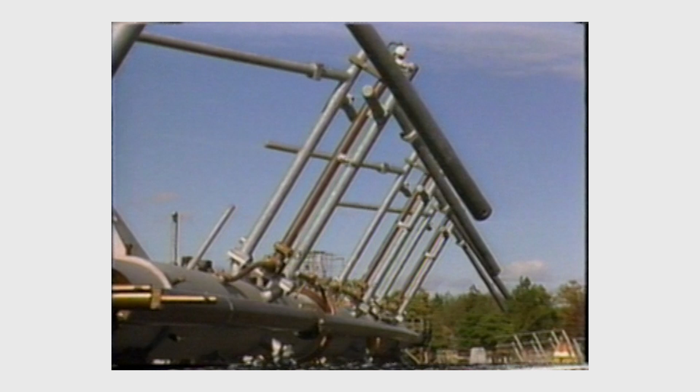For over 80 years, Dielectric has stood at the forefront of broadcast innovation. From our humble beginnings in 1942 during the early wartime broadcasts, through the golden age of television, to today's cutting-edge digital systems, we've engineered solutions that stand the test of time. From our home on the coast of Maine, we've built a global reputation. We power 85% of America's television markets and serve broadcasters in more than 80 countries.

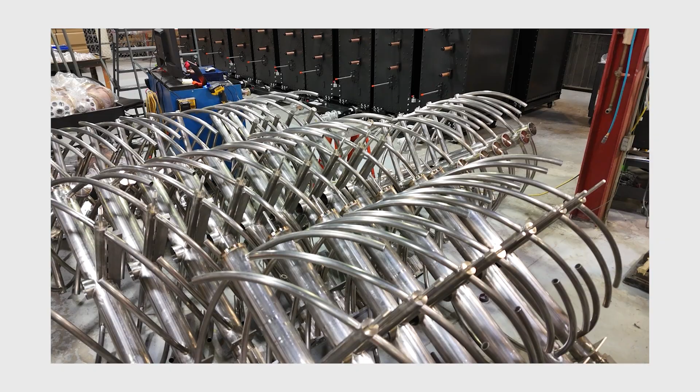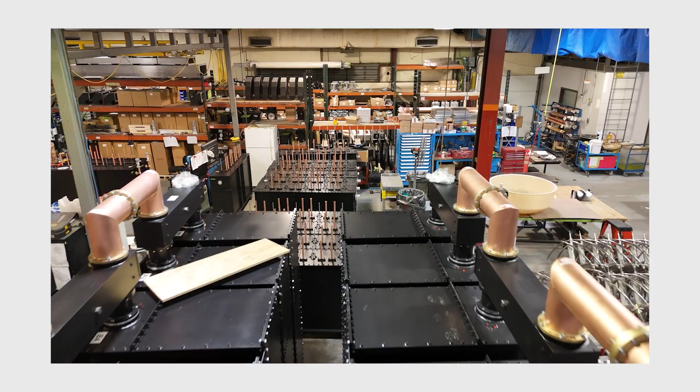But we don't just build products. We craft custom solutions for your specific challenges. What sets us apart isn't just our experience, it's our relentless drive to innovate. Where tradition meets technology, you'll find Dielectric leading the way, just as we're doing now with our revolutionary approach to FM broadcast technology. What if you could achieve superior filter performance using half the space?

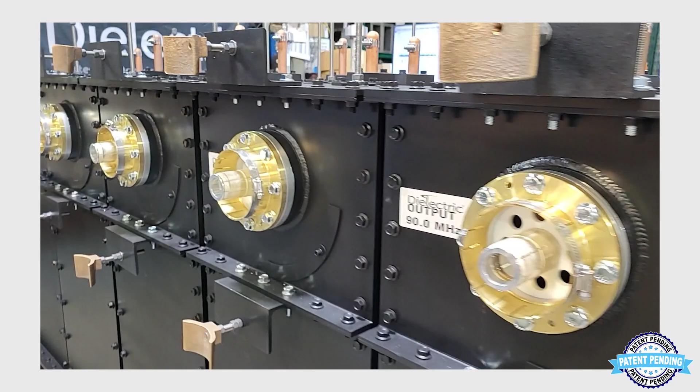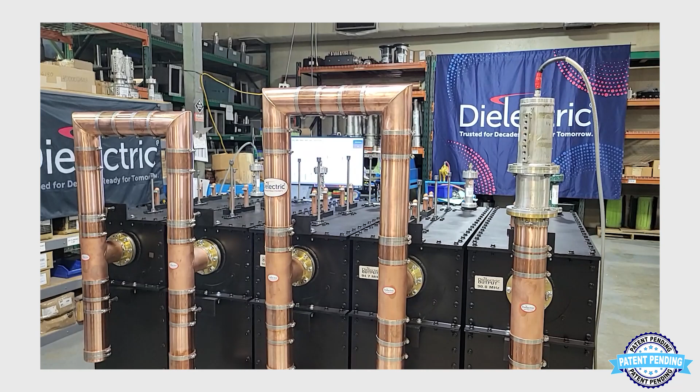That's the breakthrough we deliver with the reconfigurable Manifold combiner. As the company powering 85% of television broadcasting across America, we've applied our engineering expertise to solve the most pressing FM technology challenges. The result is a patent-pending system that's quickly transforming the industry standard. In the next few minutes, you'll discover how Dielectric's approach delivers unmatched flexibility and efficiency. For broadcasters who demand both performance and value, let's walk through how far this technology has come.

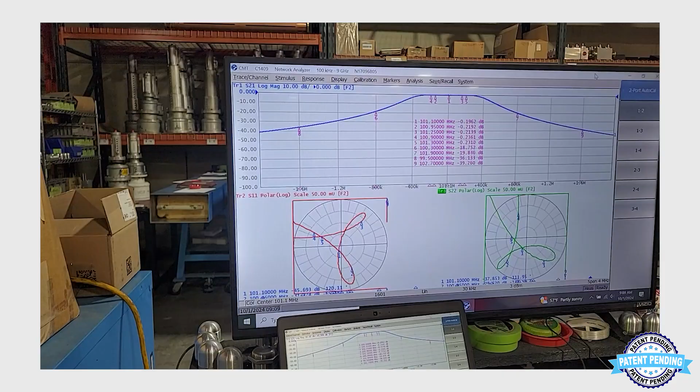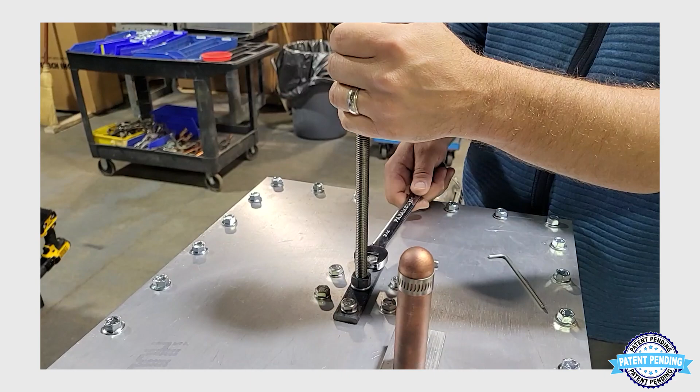We'll start where every great system begins, with exceptional components. Our filters aren't just built, they're engineered for real-world performance. Technicians fine-tune each filter with remarkable precision. That's loop-coupled design in action, allowing adjustments to the passband, rejection, and VSWR without ever reaching for a screwdriver to disassemble the unit. It's a stark contrast to what you've experienced with traditional designs.

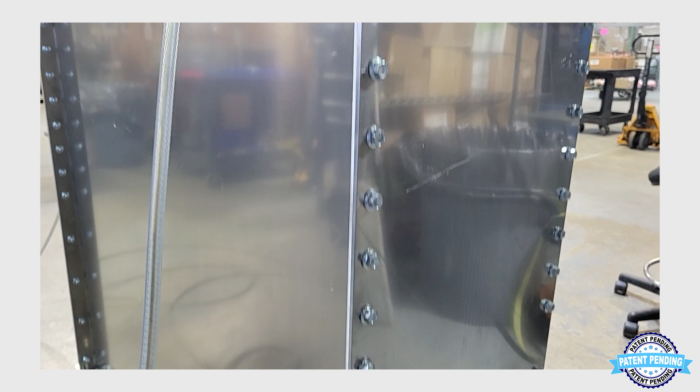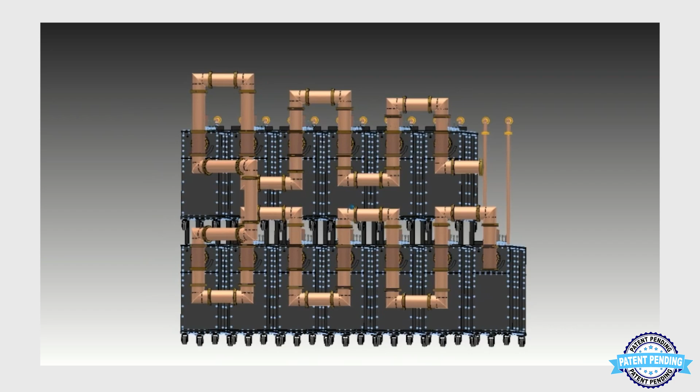We invest in materials that stand the test of time, even in challenging environments. And because we understand that every installation is unique, our design adapts to your space, not the other way around. This flexibility is something your engineers will appreciate from day one.

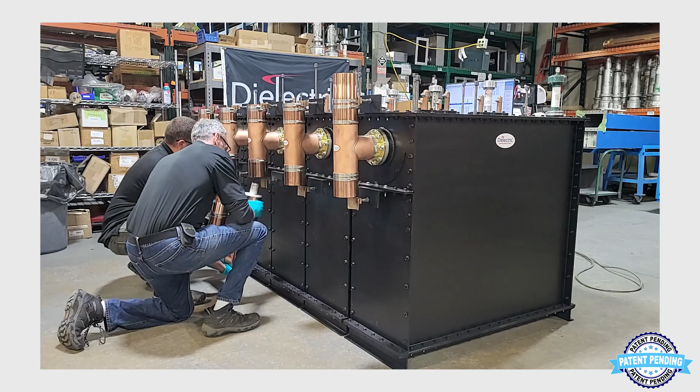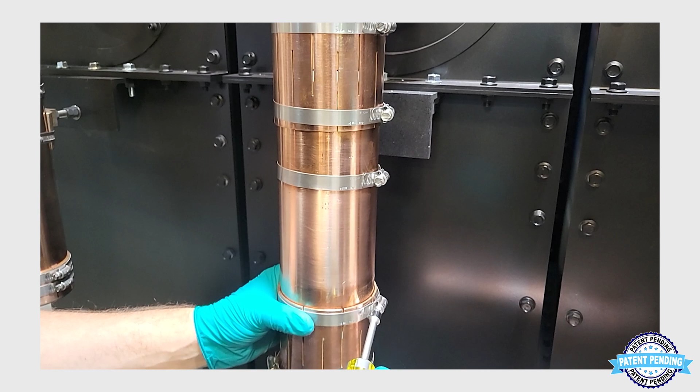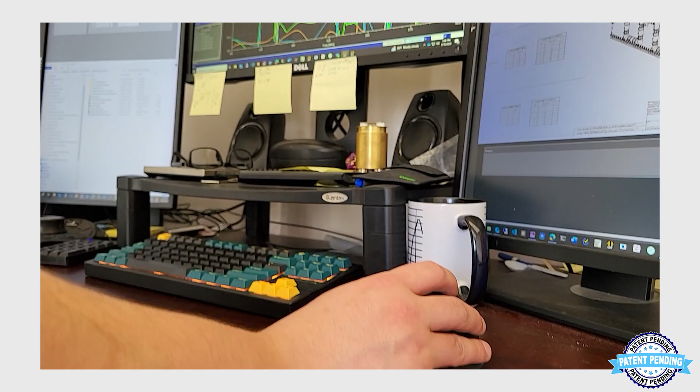Next, these finely calibrated filters come together to create a system that's truly greater than the sum of its parts. Here's where decades of engineering experience pays off. What you're watching is the assembly of a system that's already been optimized through advanced electromagnetic simulation. Remember the weeks of trial and error that traditional Manifold combiner installations require? We've eliminated that entirely. Every line length is precisely calculated before a single component is manufactured, a breakthrough that transforms what's possible with Manifold technology.

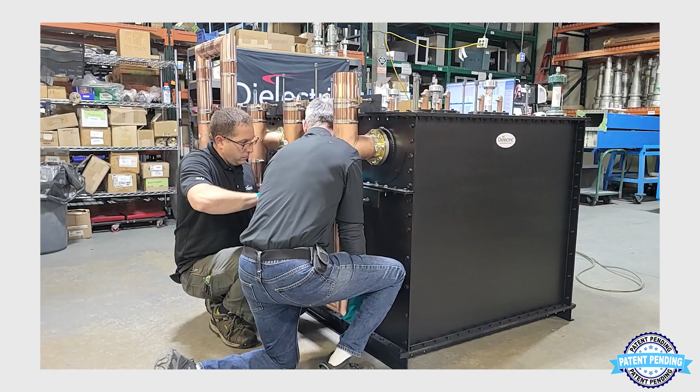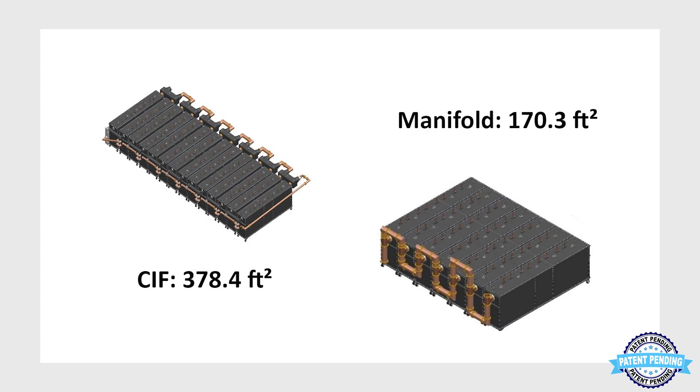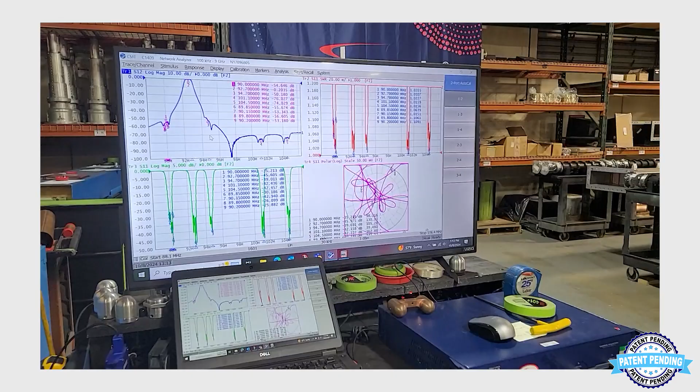The secret is in making the Manifold spine an integral part of the circuit itself. It's a subtle difference that yields remarkable results. This system requires less than half the space of a comparable CIF combiner. That's space you can use for other critical equipment, or simply to create a more accessible work environment. And because the pre-engineering is so precise, floor tuning becomes a quick verification rather than a lengthy process. The result? Faster installation, lower labor costs, and quicker time to broadcast.

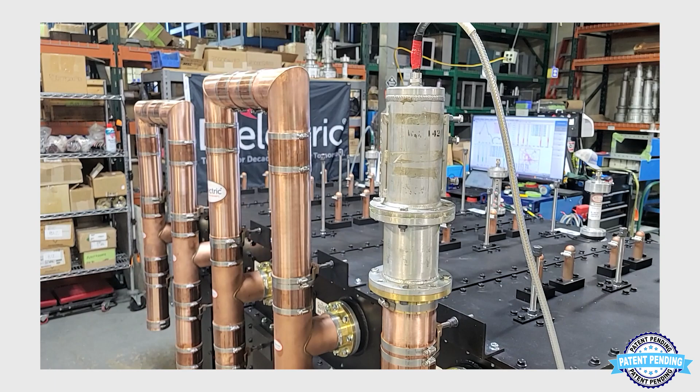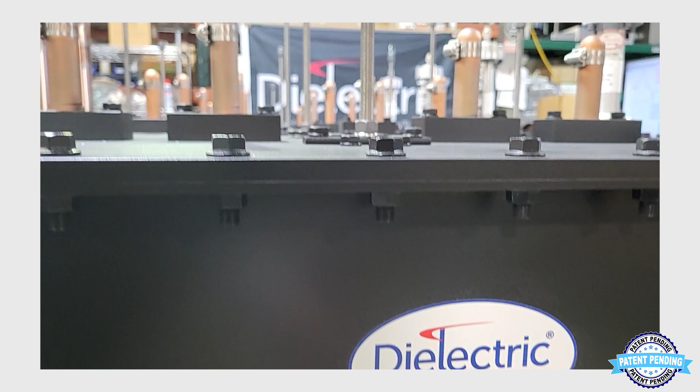But the real breakthrough is in what happens after installation, the operational flexibility that sets this system apart. Here's where conventional wisdom gets turned on its head. Traditionally, Manifold technology came with a significant trade-off, compactness at the expense of flexibility. We refused to accept that limitation.

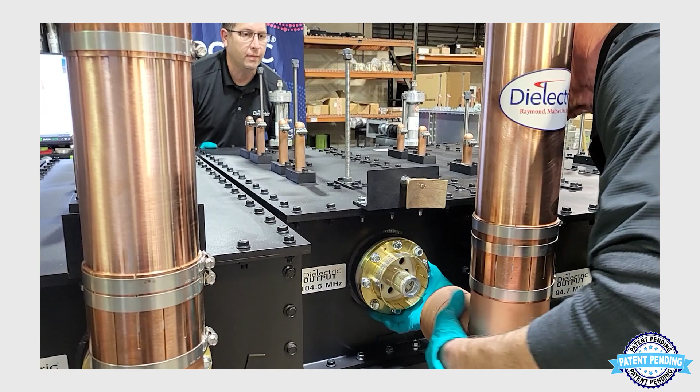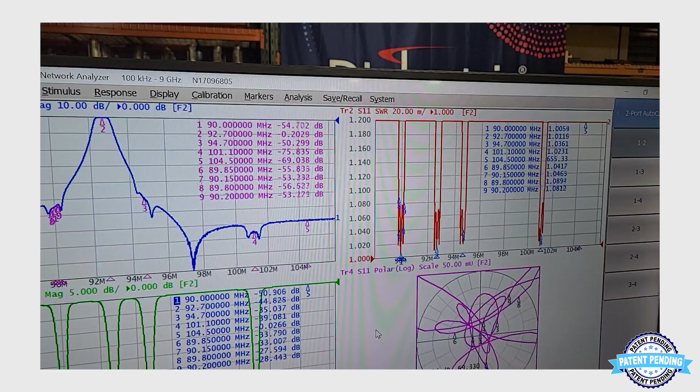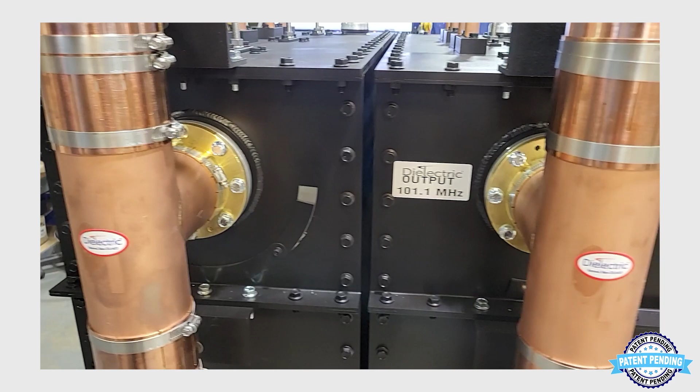Instead, our engineers worked to remove a single filter from the system and add a short to the spline. Here's what doesn't change. All other stations continue broadcasting without interruption. It's not magic, it's just meticulous engineering. This capability transforms the entire maintenance approach. When a filter needs attention, you can service it without taking your entire system offline. You can install a spare filter immediately, or the original can be serviced and returned to operation, all while your audience remains connected. Previously, such operational flexibility was only available with large, constant impedance filter systems. Today, welcome to the best of both worlds, compact size with uncompromising flexibility.

But what about the future? As your network grows, can your combining system grow with it? Let's put another industry assumption to rest. You can seamlessly add a 6th station to a 5-station manifold, something previously thought impossible without major system overhauls. This isn't a one-off trick, but a fundamental capability of the design. You can do it repeatedly with different frequencies.

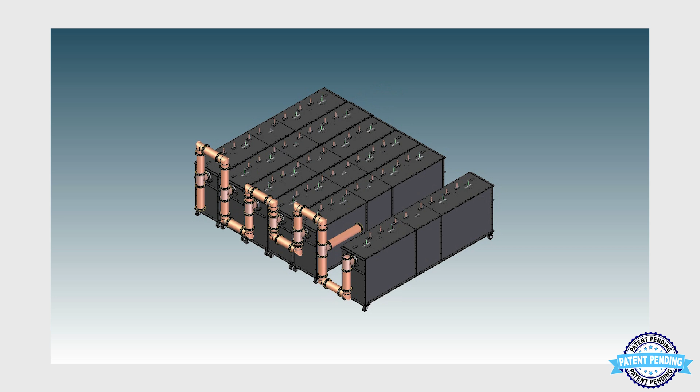The spline is designed with an unused port. If a station cannot commit at time of order to being part of the system, we simply add a port to the system as a pre-design. Then, down the road, that station can simply purchase that filter, remove the short on the unused port, and operate into the system immediately. This can have a profound impact on your operations.

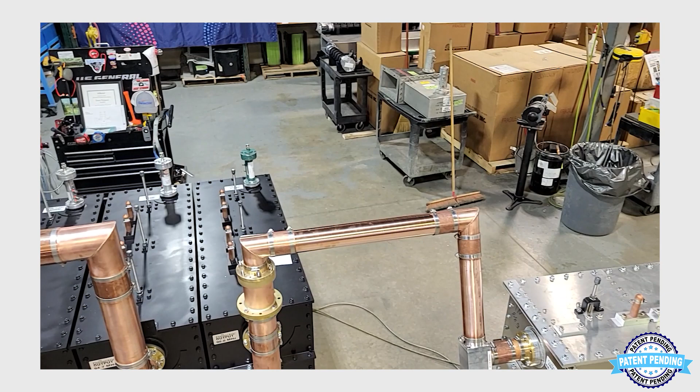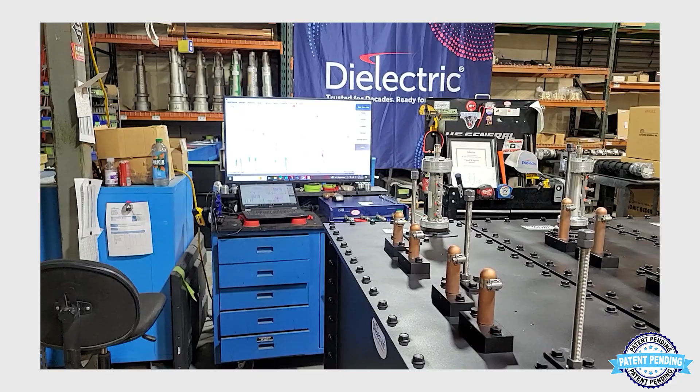As market opportunities arise, your infrastructure adapts without requiring complete replacement. The cost savings over time are substantial, not just in equipment, but in installation time and reduced downtime. And remember, the system footprint remains unchanged even as you add another station. In facilities where space is at a premium, this advantage alone will be your competitive edge. Other suppliers may continue to claim that Manifold technology can't be easily expanded. We've simply gone ahead and solved the problem.

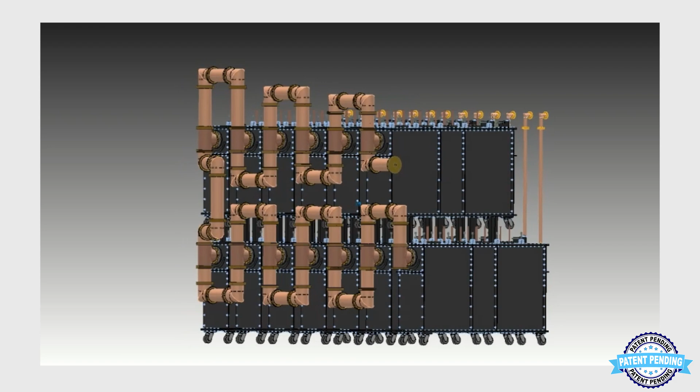What you've seen today represents a fundamental shift in FM signal combining technology. The Dielectric reconfigurable manifold combiner doesn't just improve on existing designs, it reimagines what's possible. When space is at a premium, we deliver half the footprint. When flexibility matters, you get seamless maintenance without downtime. And when growth is on the horizon, your investment remains protected with simple expansion capability.

In an industry where reliability and performance are non-negotiable, here's a solution that exceeds expectations on every metric that matters. This is Dielectric innovation at work, where cutting-edge engineering meets real-world broadcasting demands. The future of FM combining technology is here, and we're ready to revolutionize your operation today.